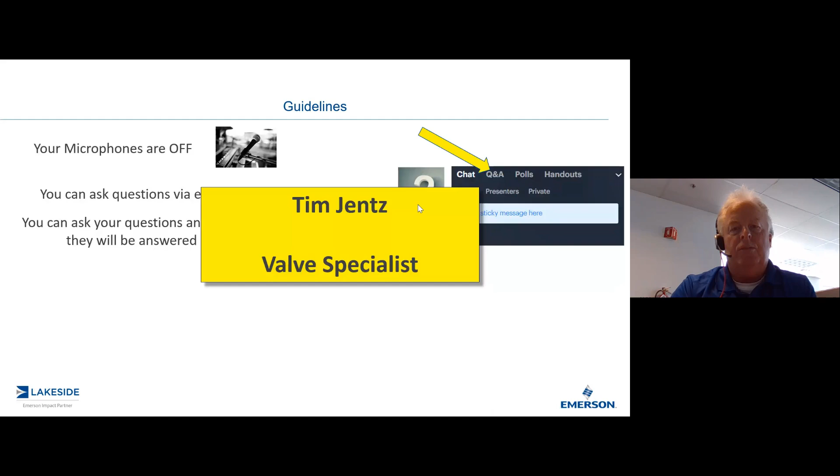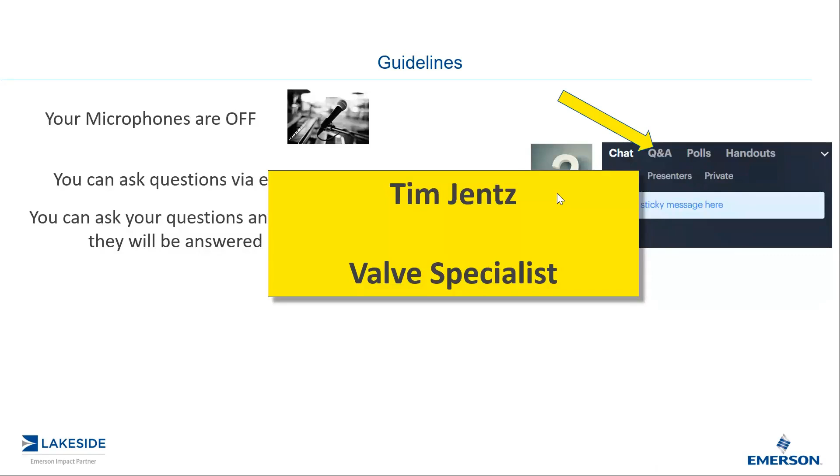Oh, there we go. There is a 10-second time delay from the moment I speak to the moment you hear me. So if light travels at 300,000 kilometers a second, that means I am 3 million kilometers away from you. And actually, this is where I'm broadcasting from.

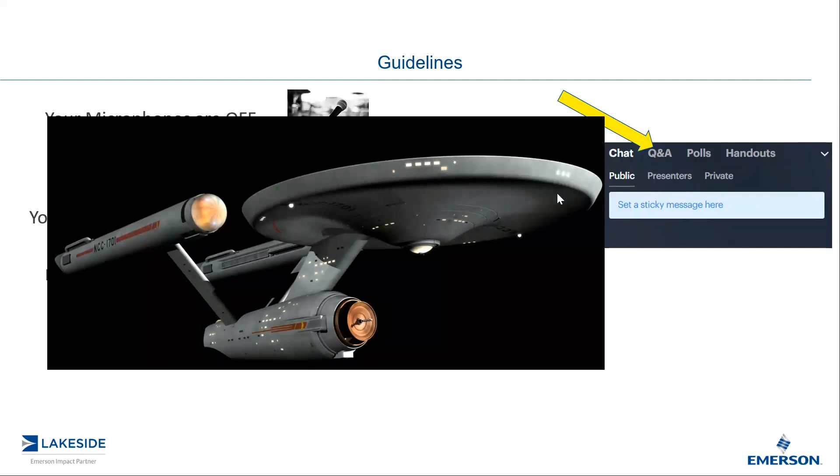And this is my other colleague here. He doesn't have a very good sense of humor. I try to make him laugh, but it never seems to work for some reason.

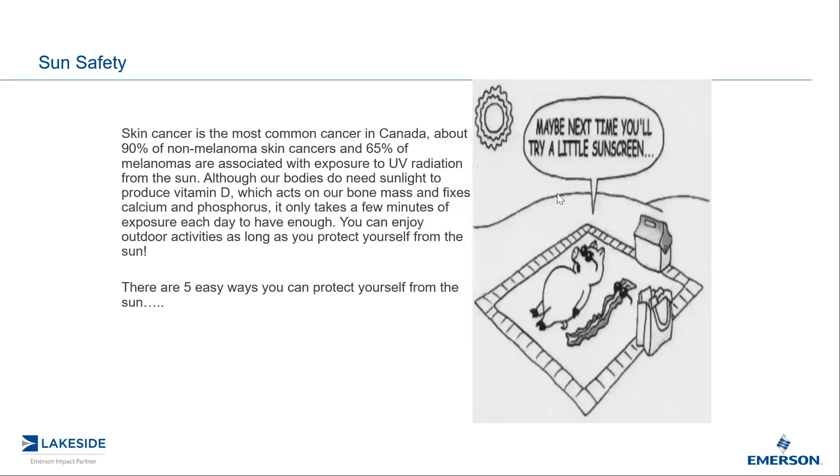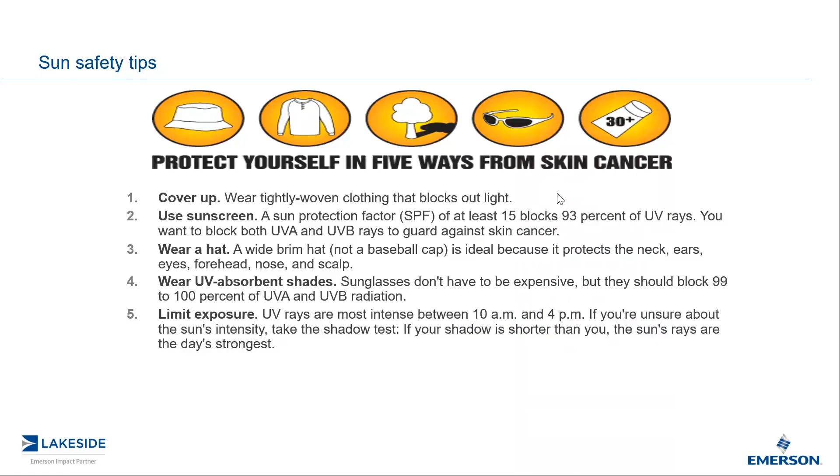Bit of a safety moment right now, and this actually touches me a little bit personally. I went to see a dermatologist yesterday, and I have a not-serious skin condition caused by excessive sun exposure. So obviously, especially on a day like today, and as the weather starts getting warmer, skin protection is very important. Cover up, sunscreen, SPF of probably up to 50. So be careful. Even if you're young, we'll all be young and stupid, but it kind of catches up to you later on in life. So be wary of this, be aware of this earlier on in your life.

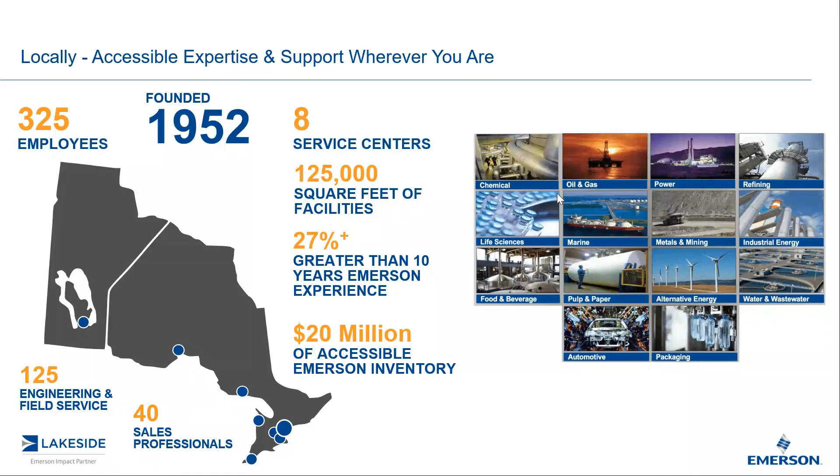A little bit about Lakeside. Founded in 1952, we have offices here in Mississauga, Guelph, Sarnia, Sudbury, Thunder Bay, Winnipeg, and Port Elgin as well. And we actually work in all these industries right there, and I've worked pretty much in all of those industries myself. Lakeside is part of a larger network called the Emerson Impact Partner Network. There are 21 of them.

We all have our own distinct territories, and therefore we do not compete with each other, though sometimes we help each other out. Our territory, number 9, goes from the Manitoba-Saskatchewan border all the way to just this side of Kingston. East of there is taken by Laurentide Controls all the way to the Maritimes, and west of us is Spartan Controls.

We're locally certified, the primary source. If you want to buy an Emerson product, we are the exclusive distributor within our territory of Emerson products. We will know who to talk to if you have a specific application, and who to talk to at Emerson to get the proper solution for you.

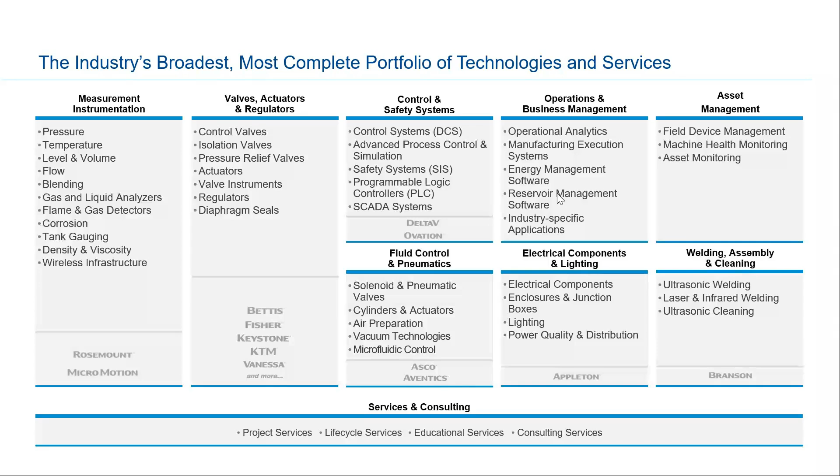This is kind of a terrible slide, but we sell a lot of stuff here. On the instrumentation side, control valves, regulators and so forth. We also have our own control DCS platform called DeltaV, and another one called Ovation, primarily focused in the power industry and water and wastewater. We also do project management, manufacturing, assembly, educational, and project and consulting services.

The idea here is we want to make sure that every time you have a deal, you deal with Lakeside, we want to make sure it's a positive experience and that we're able to help you throughout implementing your solution. A little bit about who I am.

This is a pre-pandemic haircut you see there. I go in the field and actually assist and tune control loops for customers. We talk about how actually tuning control loops is the last thing you do. We need to have a good process, control strategy, and instrumentation before loop tuning is effective.

I also deal with advanced control. MPC stands for Model Predictive Control, and neural nets as well. As a matter of fact, I know there's someone in the crowd today where I'll be experimenting with a neural net to actually predict a lab value, and hopefully, if we get good correlation, allow the operator to make a decision before we actually get the actual lab value.

So, very interesting, DCS alarm metrics. A lot of times DCS alarms as part of a DCS project are actually the last thing we think about. We tend to set all the high-high alarms at 90%, high at 80% span, low at 20%, and low-low at 10%. We don't put a lot of thought into it.

When we start up the plant, we get a whole bunch of alarms, and two things will happen there. First of all, it's like, where's Waldo? If we have a critical alarm coming in with a full alarm banner, there's a good chance the operator is going to miss it, and that's when bad things happen.

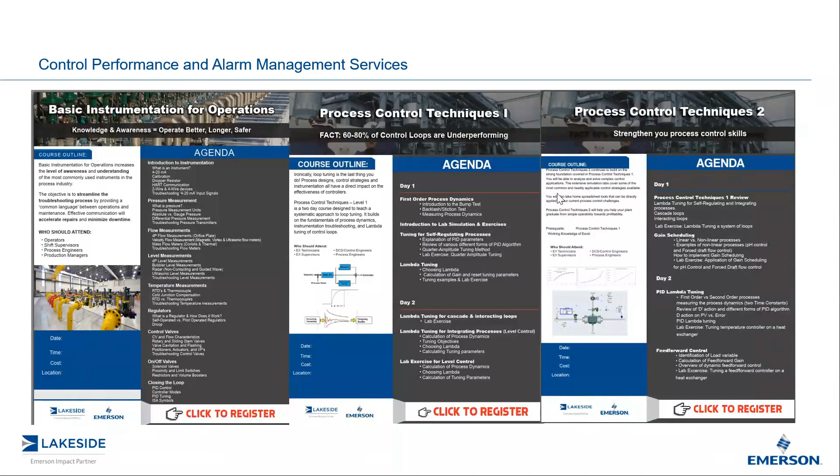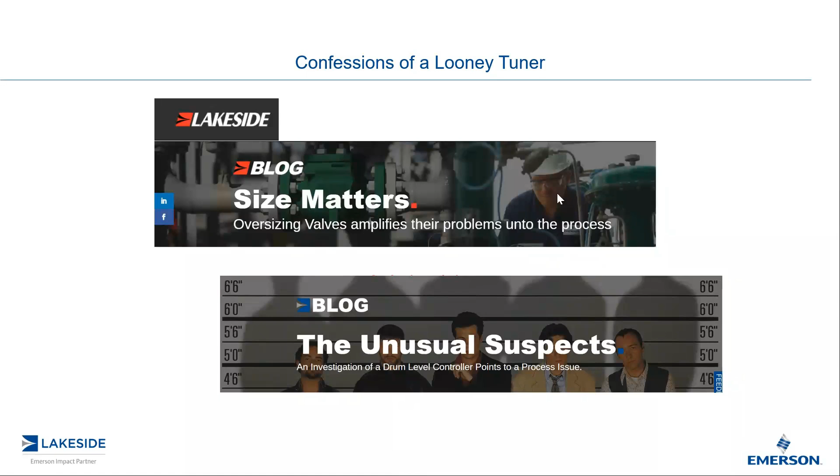So, okay, this is the thick of it here. What are we going to cover?

We're going to talk about what a control valve is, the components of a control valve, different types of valves, the CV curve and how it relates to actual flow, valve sizing, backlash and stiction, and the EnTech valve spec.

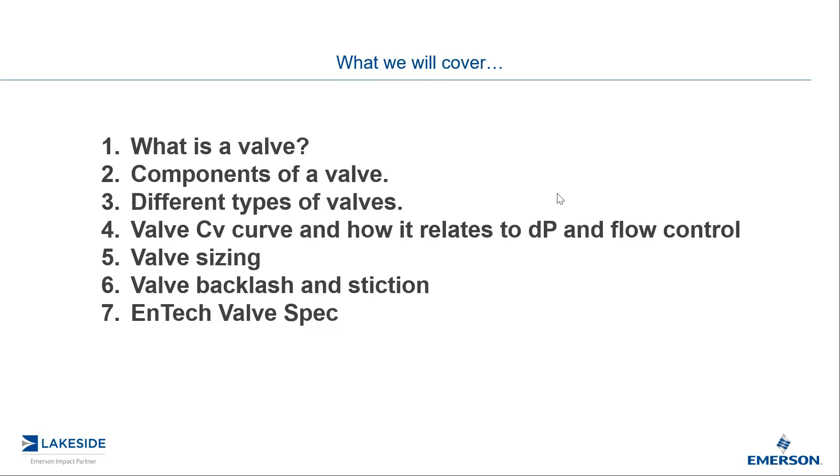I'm not sure if you have it, but the EnTech valve spec is actually available if you go to your handouts tab, you can download that PDF should you wish to.

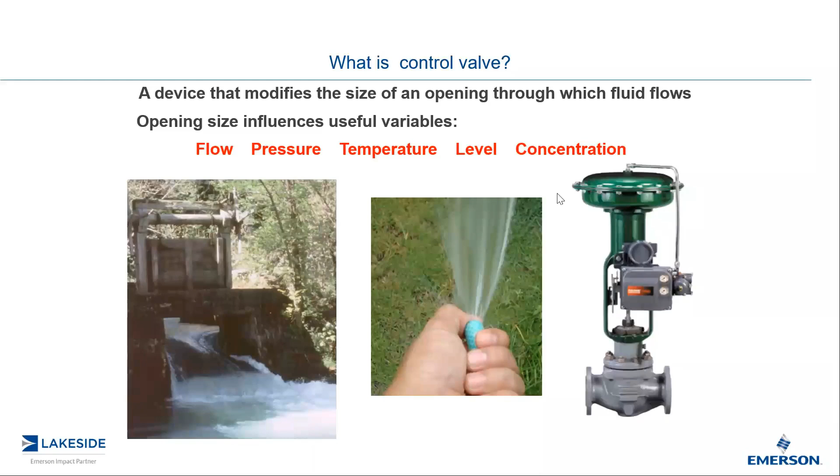So what is a control valve? It's a device that will modulate flow. Now we have level control valves, pressure control valves, temperature control valves, and so forth, but a control valve will modulate one thing and one thing only, and that is flow. It'll do that by varying the size, the aperture of the opening within the valve body itself. The more open it is, the more flow it will pass through.

The actuator is the muscle that will actuate that valve, be it linear or rotary. In this case, it's a linear valve. We have diaphragm actuators, piston actuators, single acting and double acting piston actuators, and you can also have electropneumatic actuators as well, and electric actuators.

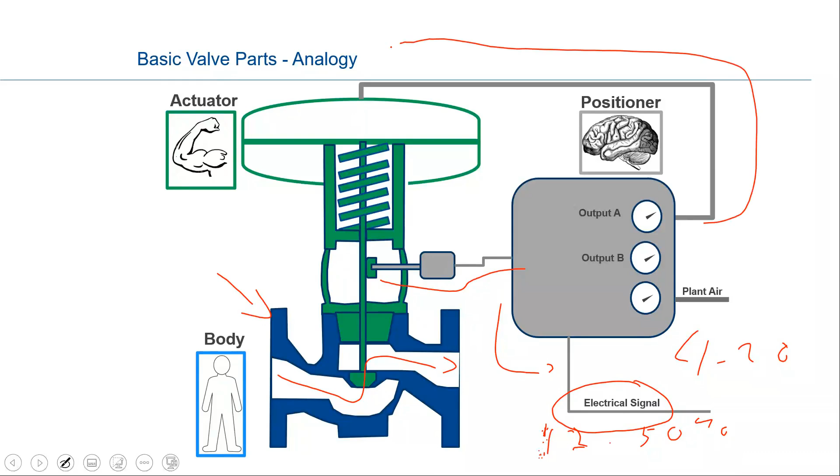Based on where the valve position is and where we want it to be, it will then actuate the valve to make sure that it comes back to where it should be.

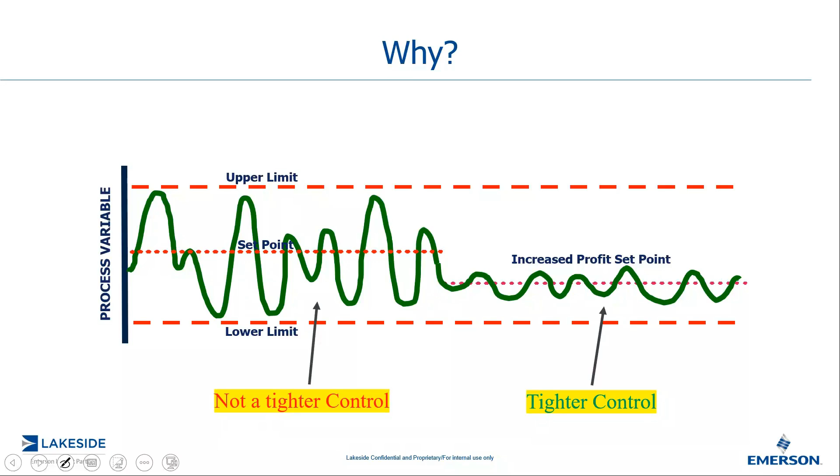And why do we do this? Why do we go through so much trouble with control valves to have the right actuator, properly sized, and a positioner? It's because the more precise and dynamic a control valve will be, the better control we will get. Based on that, we'll be able to do tighter control, target shift, and increase our profit margin, increase our production rate, decrease our material costs, and energy costs.

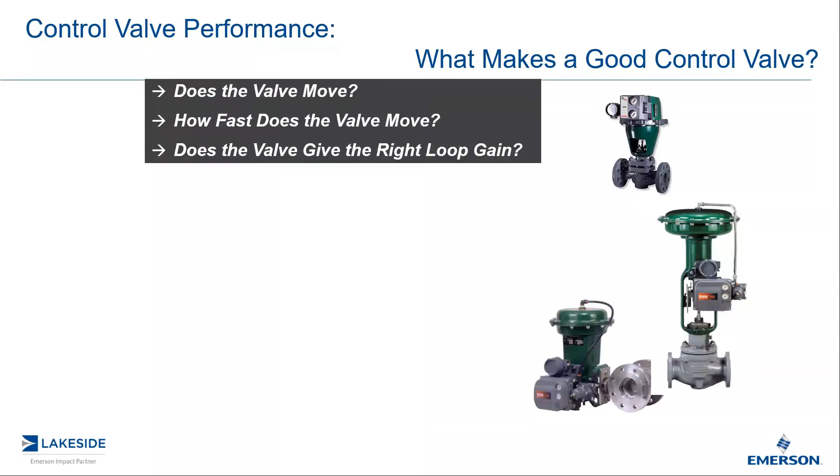Thanks Sylvain. So obviously a good control valve needs to make sure that when it's designed, it has a number of good attributes that make sure it will respond to the control signal. So what are the three main things? Does the valve move? How fast does it move? And does it have the right gain? And I'll be careful with that word gain, because Sylvain will get into that a little bit later when he gets into the meat of his material.

So obviously, Fisher Controls, the manufacturer of the valves that we deal with, does a lot of flow geometry testing using CFD and design modeling to make sure that when the flow goes through the valve, it's stable and there's no instability when the flow is going through the valve.

I get a lot of questions from the field about good and bad friction. Well, there's really not good and bad friction. What we need to understand is what the friction is in this valve, and make sure it stays within the design parameter spec it had when it left the factory, so it can hopefully maintain that same friction.

Sylvain will get into that. And we need to ensure there's no lost motion, what we'd call slop, a slang term, but we want to make sure there's no slop in the control valve.

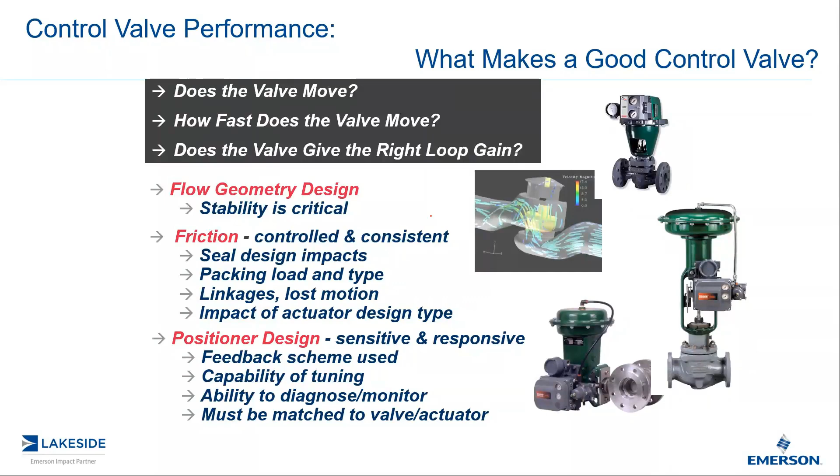There are two types of valves: rotary valves and sliding stem valves. This is a rotary valve, a very common bread and butter type, a V-ball valve. You can see there's a V notch. It's actually a ball valve, though that can be a misnomer because it's really a segment of a ball, not a full sphere. The V notch actually improves linearity.

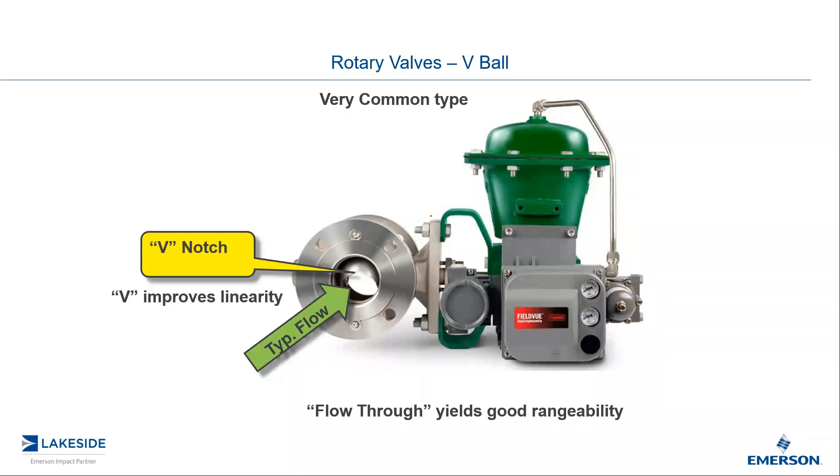This is going to be critical, we'll talk about it later when discussing linear flow characteristics. Typically the ball will face the flow, in most cases, not all. When the ball or valve is completely open, the fluid passes straight through, so there's no tortuous path. That gives it very good high rangeability.

A rotary valve like a butterfly valve is essentially a disc that rotates, changing the open surface area to allow more or less fluid to pass through.

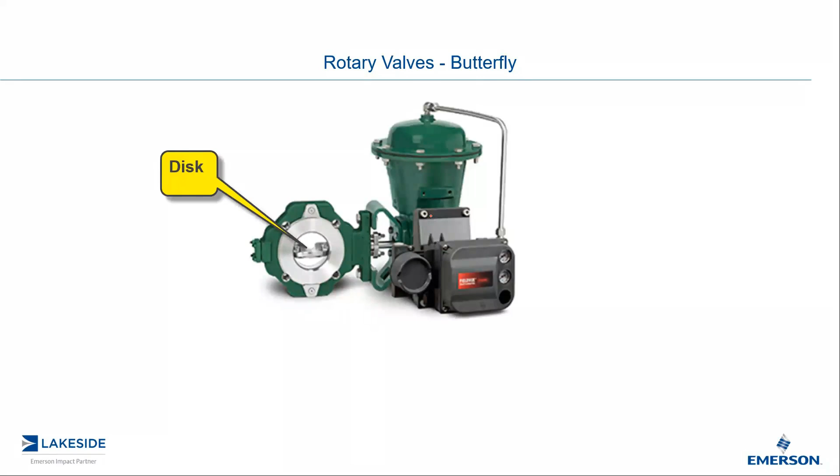Now you've got to be careful here, I know Tim's listening to me right now. A traditional butterfly valve has a quick opening flow characteristic, which we'll talk about later. But we do have other models, what we call a control disc, which isn't an attachment but a modified disc that provides more linear flow characteristics. Maybe Tim, you can add to that.

Sorry, Sylvain, I was typing, you probably heard me typing, so you might want to repeat the question. I'm sorry, no it's not a problem, I can't multitask either. No, I was talking about the quick opening flow characteristic of a traditional butterfly valve.

But we do have also something called a control disc that can provide more linear flow characteristics. I was wondering if you could add a little bit to that.

So the control disc is a design that Fisher has put into the shape of the disc, and depending on how it's modified, we can actually create a CV curve that's equal percentage based on the shape of that disc. So it's not your traditional shape that everybody's familiar with.

It's actually got, and I'll use the term, and I know Fisher sometimes doesn't like to hear this because it's not technically right, but they'll put a fishtail on it, and the tail will actually be on the upstream side of the valve. As the valve opens, it actually creates an equal percentage flow, which Sylvain will get into, and that's a good thing because it allows for traditional applications where butterflies would go to actually be used in a wider range than a traditional one. Awesome, thank you very much.

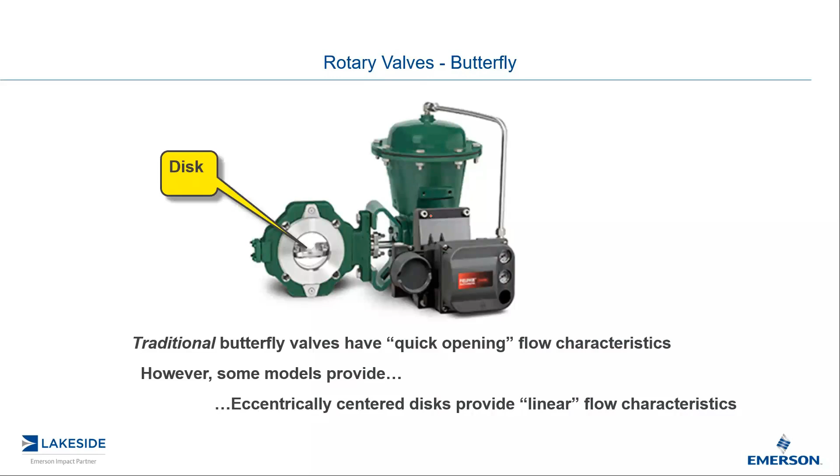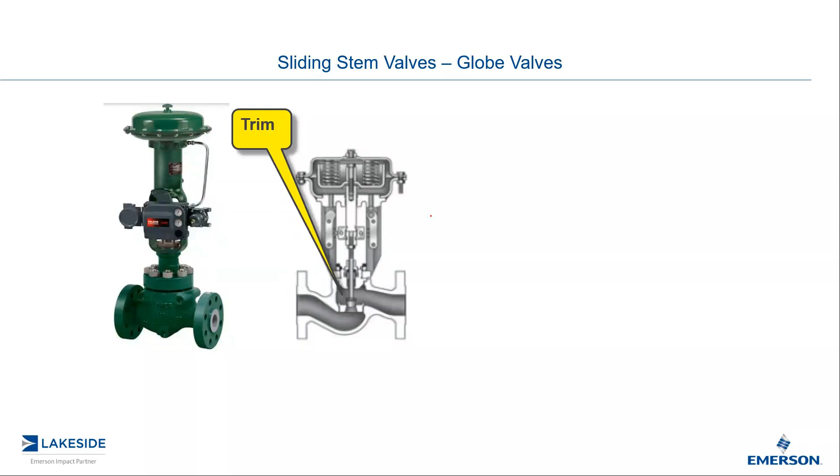So sliding stem valves, as the name implies, the actual stem will move up and down. So it's a linear valve. And right there is a trim. The shape of that trim right there will determine the flow characteristics. Now, what I'm showing you there is actually a stem-guided valve.

But there is also a cage-guided valve, so maybe I'll go backward here. Globe valves are very good at good rangeability. We'll talk about that a bit more later on, but they can actually modulate from about 20 to 25% open all the way up, getting good modulation range up to about 80% open. A lot of other types of valves no longer modulate at such an open percentage.

So they're very, very good at modulating a very wide range, as well as they can handle very large pressure drops. I've seen some, especially severe service types of valves, where they can handle up to even 1,000 psi. They're very specialized, but they are a specialized type of valve. But they are sliding stem valves as well.

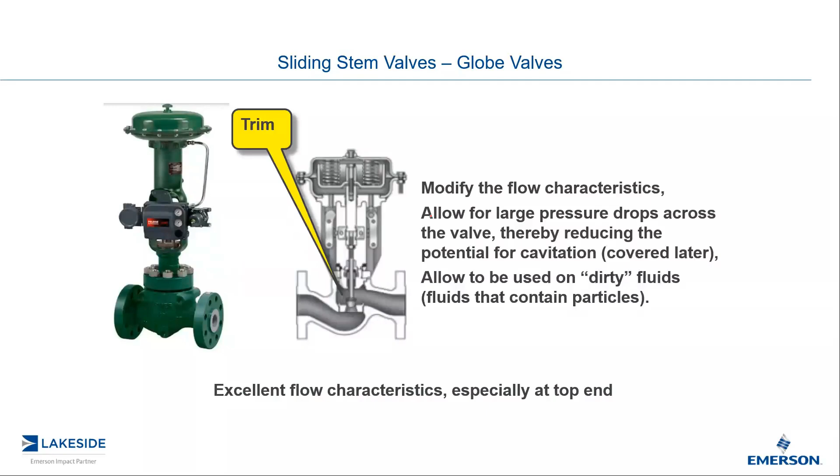And as I mentioned, there's also a cage-guided valve. So what you can see there, inside that cage is actually just a cylinder plug, just a plain old plug that moves up and down. As it moves up, some of the fluid will start to come out through the actual characteristic, the opening there. And you can see the shape of that opening will determine the flow characteristic of the valve itself.

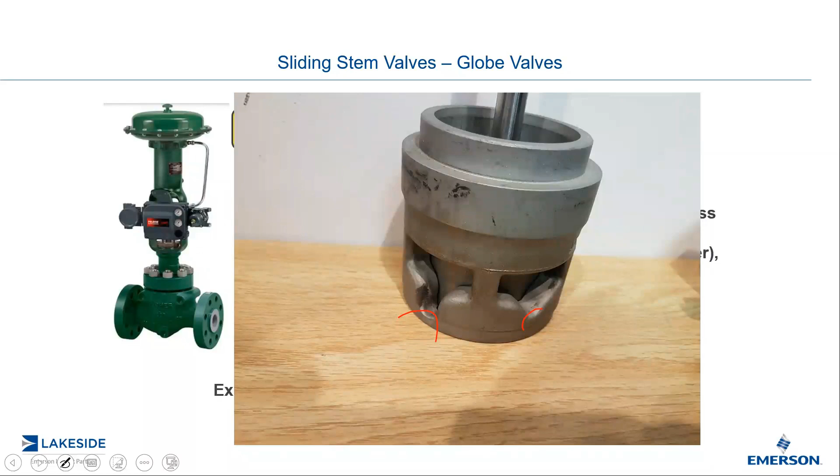So when you buy a control valve, it comes with a CV curve. Typically CV curves can be equal percentage, linear, and quick opening. And what I'm going to do now is put a poll out, and I'll give you about 5 or 10 seconds to answer which one of the CV curves do you think is most common.

Oh, it's coming, they're coming in. This is great, thank you for participating. And it's a bit of a close race. So 44% said equal percentage, 34% said linear, 21% are saying quick opening. You can keep on answering. Thank you for participating.

So actually the most common type of CV curve is equal percentage. Now it makes you wonder why. I mean, don't I want a linear kind of flow response? I want to achieve a linear flow response, but you have to understand that as I open up my valve,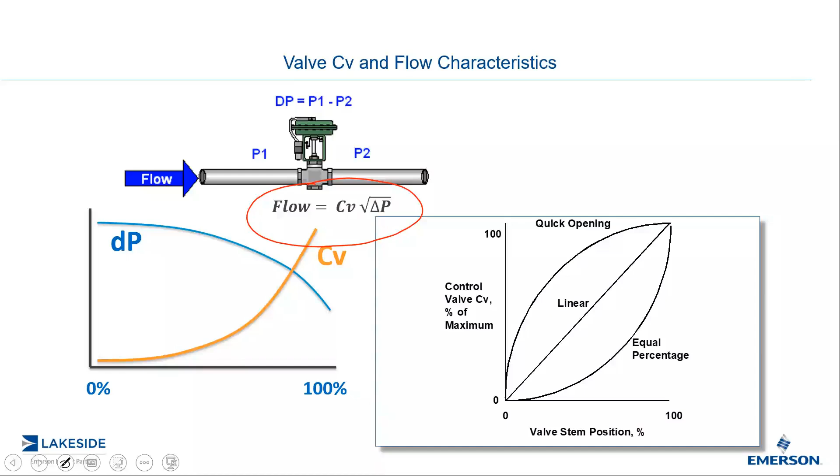And you can see here, you can imagine as I open up my valve, the opening gets bigger and bigger, there's less resistance. I will then lose less energy as the fluid passes through. Therefore, P2, the downstream pressure, will tend to go up. Therefore, the differential will tend to go down.

Now there's also another situation as well, especially for liquids, where you have a pump curve. Each centrifugal pump will have a pump curve, it can only deliver so much energy. And the more flow being generated, being pumped, the lower the discharge pressure will be. So you've got a bit of a double whammy here.

So therefore, that's why as the valve opens up, we know the pressure drop, the DP, will fall. And that's why we need that extra kick as the valve opens up to compensate for that. Hopefully, we will have a linear flow response. That is our objective.

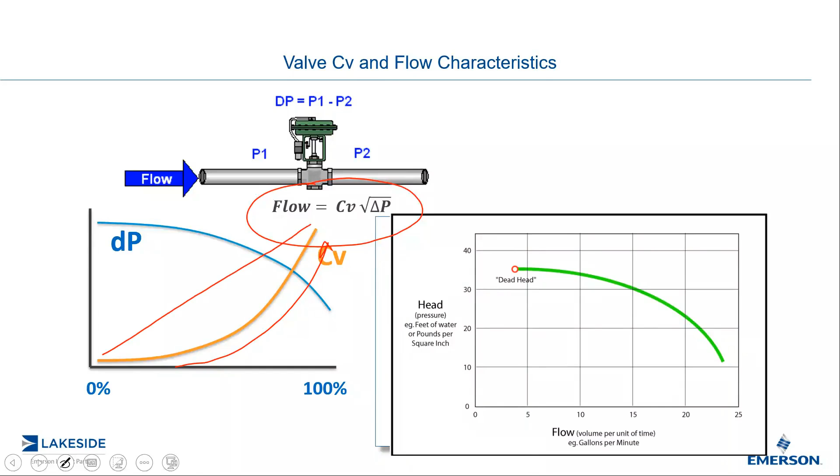So this is what can happen here. This is actually what happens when this is actual real data, and this data was collected back in December of 2018.

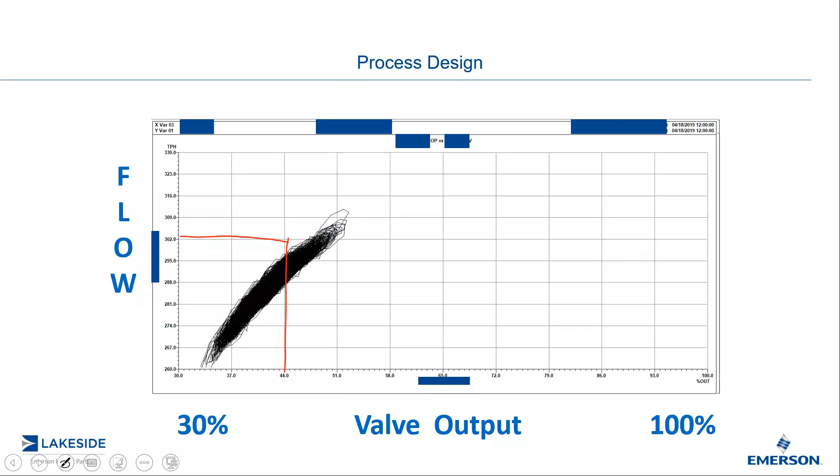What I want to show you here is actually a pump failing, and the pump is wearing out. So you could see here at 44%, in this case, I was getting 302 tons per hour of flow. And then in April, you could see I'm getting less flow for the same valve opening. And then in May, even less.

And so the issue was that obviously if we're actually operating right around here, we were no longer modulating the flow characteristic. In this case, because the pump was failing, was wearing out, they were not able to actually modulate and control the drum level. In this example, this is feed water, very, very well, because they were actually not able to modulate. So this is kind of similar to a type of valve that we're going to talk about in a minute.

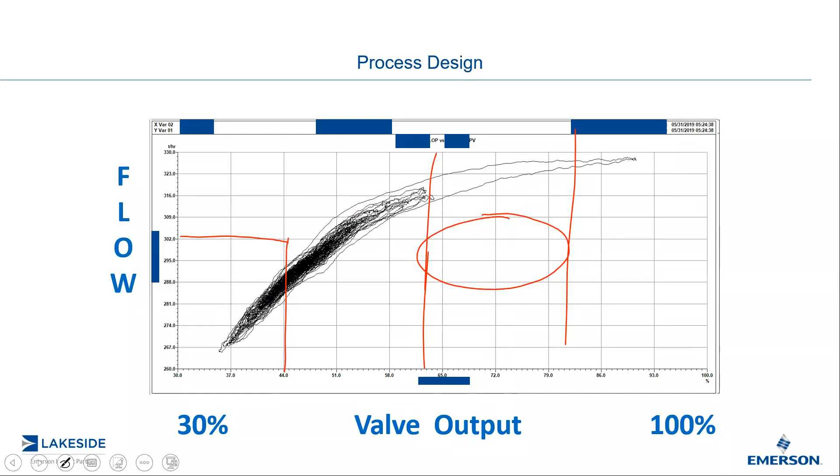And again, this is the actual pressure versus flow curve, or flow versus pressure curve. You can see the more flow being pumped, the pressure is actually dropping. This is back in November of 2018, and then this is in May of 2019. So you could definitely see, if I flip back and forth, that the pump is actually wearing, that curve is dropping lower and lower and lower.

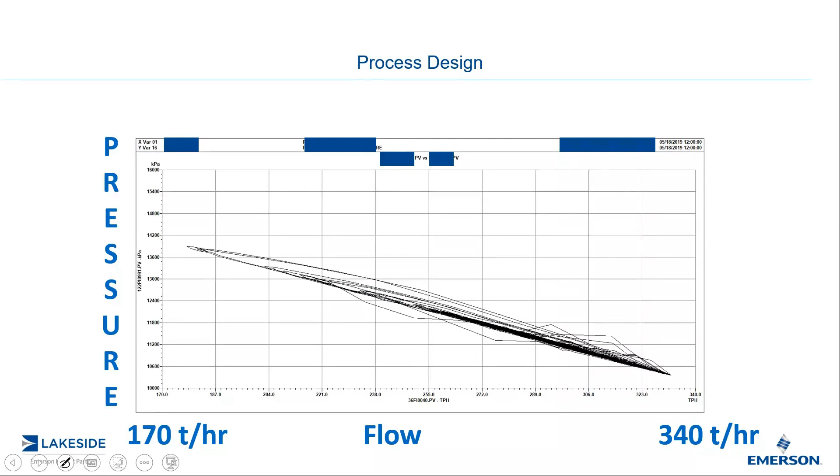So I'm going to show you a bit of a demo here, to further that concept. There's a lot going on here. Okay, so this is a simulation that I built. Don't get too excited about this, it's kind of a rough simulation.

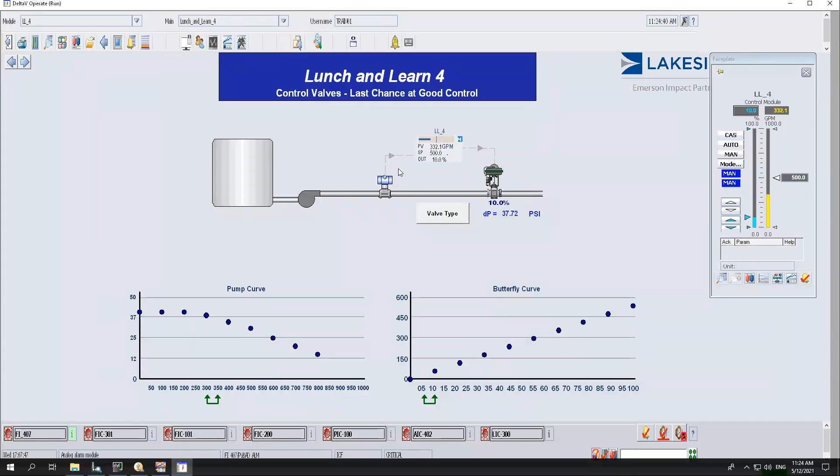But what I've done here is I built a pump curve. So the bottom axis here is the actual flow. This is a flow control valve, we're measuring the flow, we've got our controller here, the faceplate is right here, the output goes to a control valve. The valve's at 10%, and right here there's 37 PSI drop across that valve right now. And as the flow increases, the actual discharge pressure of that pump will start to drop.

Now I can have two different types of valves here. Believe it or not, and I always found this kind of hard to believe myself initially, a butterfly valve actually has a borderline equal percentage CV curve. So on the bottom axis here you see the valve opening from 5% to 100%, and that is a CV value on the y-axis.

So here we go to 50%. And now I'm still operating in this range, and now you can see I'm definitely falling off the pump curve. So let me show you this in a trend.

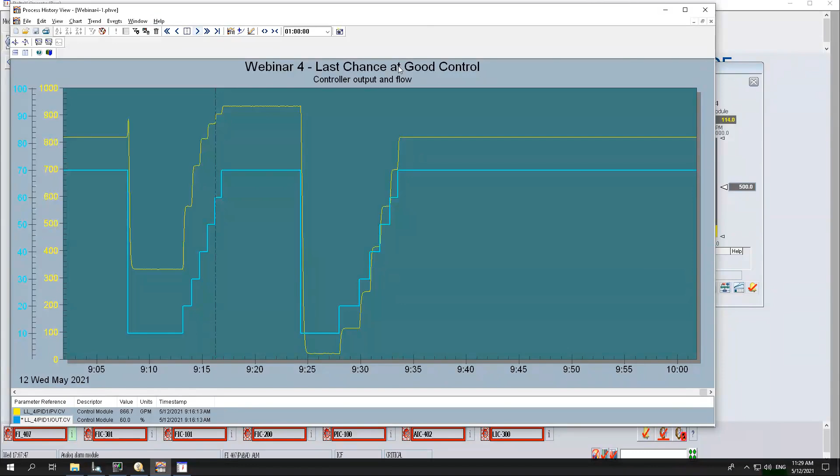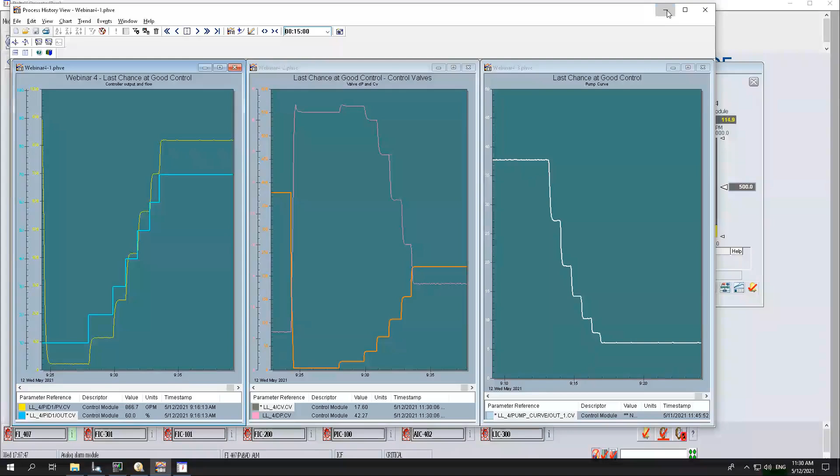One more thing I want to show here, let's go back here a bit more. This orange here is the actual CV as the valve opens up. Let me set this up properly again. You can see here for smaller openings, I get less CV change, but the more I open, the CV increases. Essentially it's following the CV curve we just talked about. That equal percentage is there to compensate for that drop in pressure, and we're trying to linearize the flow.

Let's talk about valve sizing. Valve sizing is very, very important. So when you call up Lakeside and say I want to buy a control valve, we're going to ask you a lot of questions, from what type of fluid it is, to what the inlet pressure will be, and what the outlet min, max, and normal flow are. Based on that and a lot of other questions, we'll determine what type of valve and what size of valve should be used.

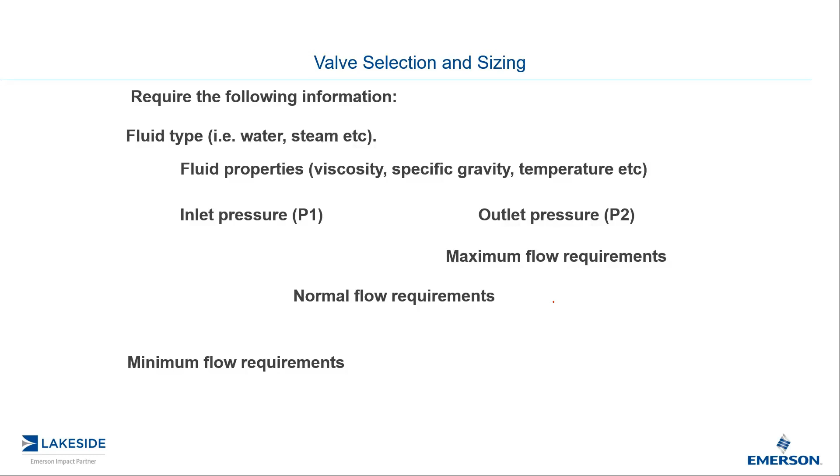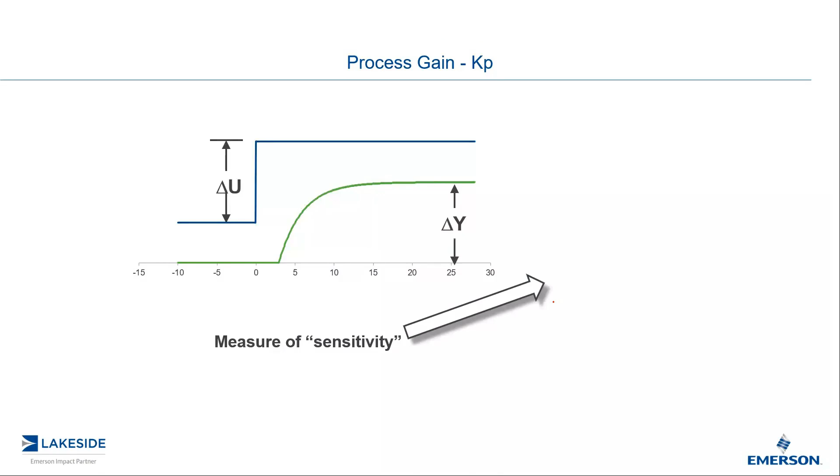Now I look at it from a control perspective, from something slightly different, from the process gain. Again, we're not talking about a PID proportional gain here, so that's why I shy away from using the term process gain. I'd rather talk about process sensitivity. The process sensitivity is a ratio of a change I get in my process versus a change I made in my output, the command to the valve, and then I observe how much change I see in my process.

I talk about this in the universal language of percent of span. The process sensitivity, Kp, is the ratio of a change I got in my process for a change I got in my delta U. So for a properly designed control loop, Kp, your process sensitivity, should be between 0.5 and 2.0. That means for a 1% change on my output, I want to see my process change between 0.5% of span to 2% of span.

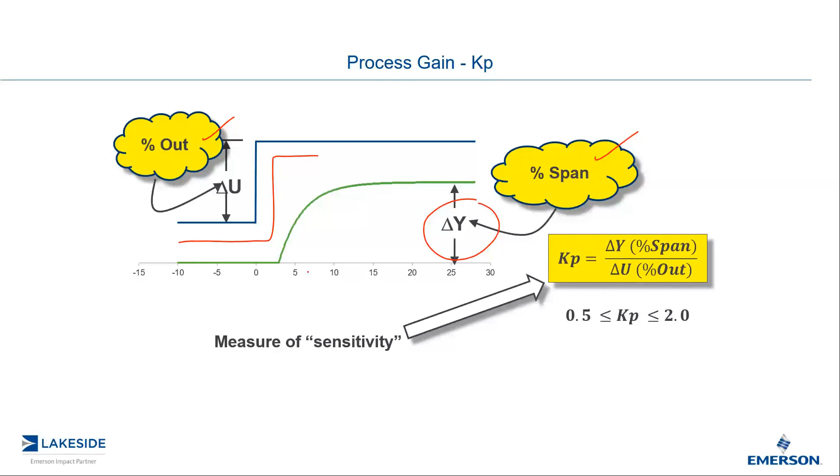All too often though, I'll go in the field and do some bump tests, and I see my process gain could be 3, maybe 4, maybe 5. That means for a 1% change over here, I'll see a 5% change on my process. What do you think that means? Well, if I do a small change and get a big change in my process, the odds are - no guarantee, but odds are - that valve is probably oversized.

Why? What's wrong with oversizing control valves? First of all, a control valve that operates at 25% or less most of its life is likely to be oversized, and we're wasting a lot of horsepower across that valve. We may even end up wearing out that valve because the velocity of the fluid passing through is so high. But the biggest problem with oversizing is that if I have a 1% problem on my control valve - backlash and stiction, we'll talk about that in a minute - it translates into a 5% problem on my PV. Therefore, oversizing control valves can make small valve problems big problems on my PV.

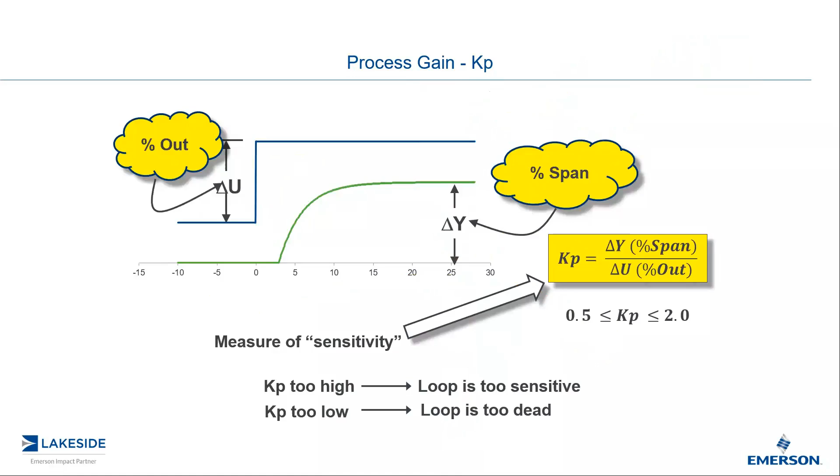And that's something we want from a control perspective. We like things to be as linear as possible. It makes tuning more robust at a wider range. That's why we want a more linear flow characteristic.

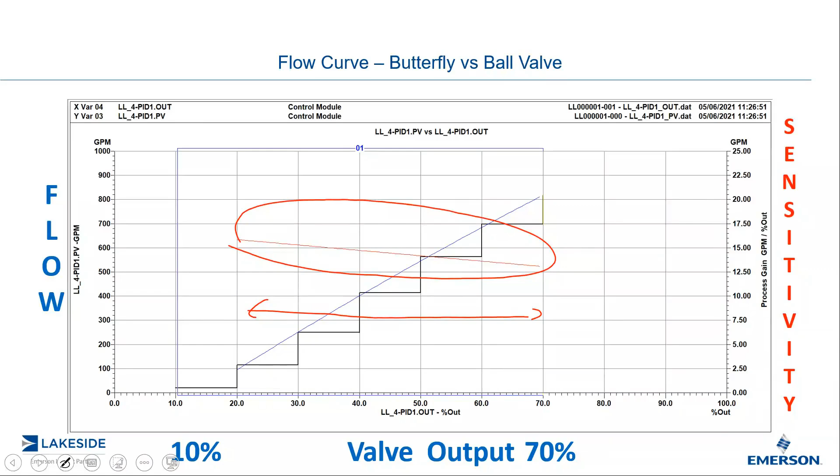Now, you heard me hint about valve backlash and valve stiction. Precise control equals good control. So a control valve needs to be precise, and that's why we talk about putting a positioner on a critical application, a component of the control valve to make sure we actually position that valve precisely.

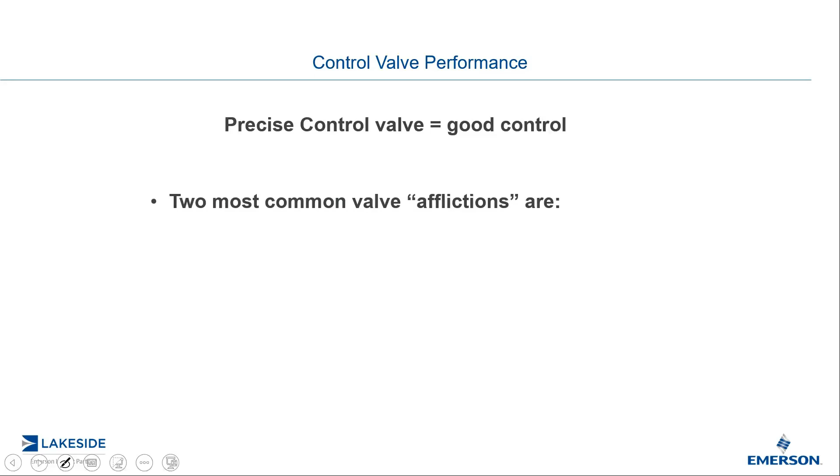Now, control valves suffer from two major afflictions. One's called backlash or hysteresis, and the other one's called stiction, or a sticky valve, a valve that hunts.

So how do we actually detect it? When I go to a control valve, I want to do some bump tests, because that's how I'm going to calculate some process dynamics when I do my bump tests, and that's how I actually will use that information in my tuning.

But also, I use the bump test to determine how precise the control valve is. So I typically start with 1% bumps.

There are two reasons why I do 1% bumps. One is to measure the precision of the control valve. The other is that I don't know if this valve is oversized, undersized, or anything like that. So I start with 1% bumps because I don't want to disturb the process more than I need to, to be able to measure my process dynamics.

Believe me, I've joined the megawatt club once, and once is enough. Yes, I tripped 100 megawatts once, and it was not a pleasant situation.

So here I go 1% up, 1% up, 1% up, 1% up, 1% up. Everything looks good. Now, backlash or hysteresis, the terms are interchangeable, is due to mechanical looseness, mechanical slop, as Tim calls it, within the valve assembly.

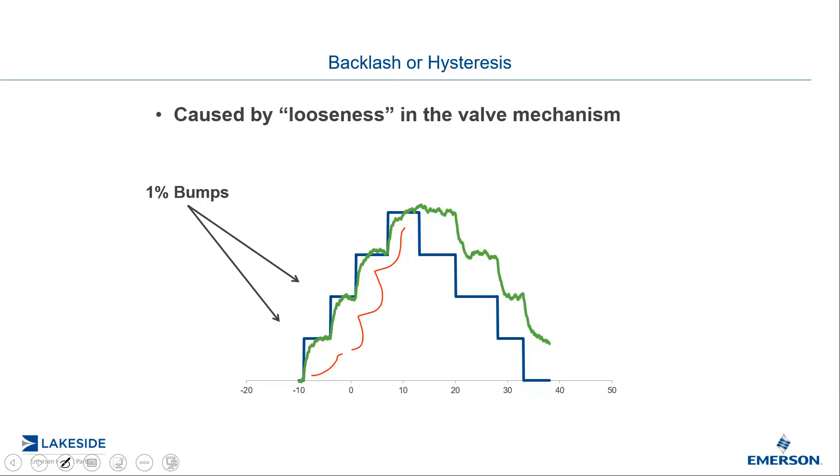The way that demonstrates itself is that when I now reverse direction, I will not see any change in my flow. In this example, I'll have 1% imprecision in my control valve, and that 1% imprecision will have a direct impact on our ability to control.

So I'm going to show you a video here.

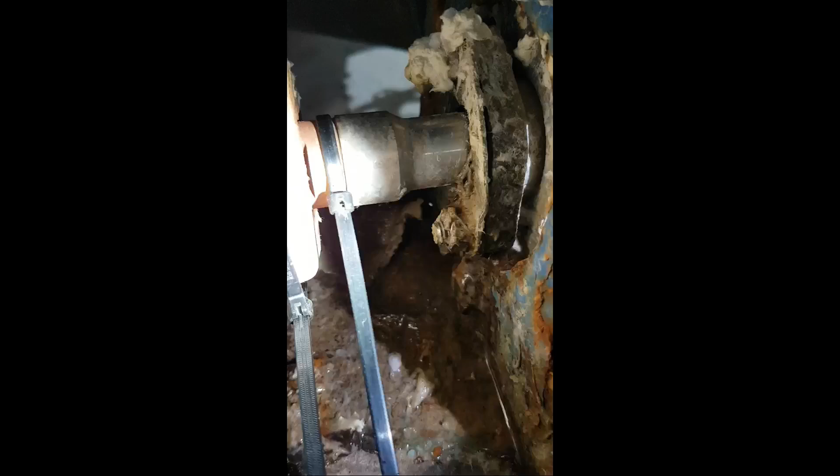Let me set this up first. So what you see on the right-hand side are two tie wraps. One tie wrap is actually attached to the valve stem. As it goes towards the right, that is going into the valve body itself. It is a rotary valve. That stem is then mechanically coupled to the actual valve actuator, and that's where the second tie wrap is. I use those two tie wraps to indicate the position, and it's patent pending, so you're not allowed to use that invention. I'll play it, and you'll hear me in the background.

I'm not sure if you hear me or not.

Now they're moved together. Backlash is taken up, so at this point the backlash is taken up. I'll pause it right there. The next thing is the valve will start to close, meaning the tie wraps will start going down. I want you to pay attention to the left tie wrap compared to the right tie wrap.

Now it's going to go the other way before it actually engages. As you can see here, in this example I would guess probably 6 or 7 or 8 degrees of backlash.

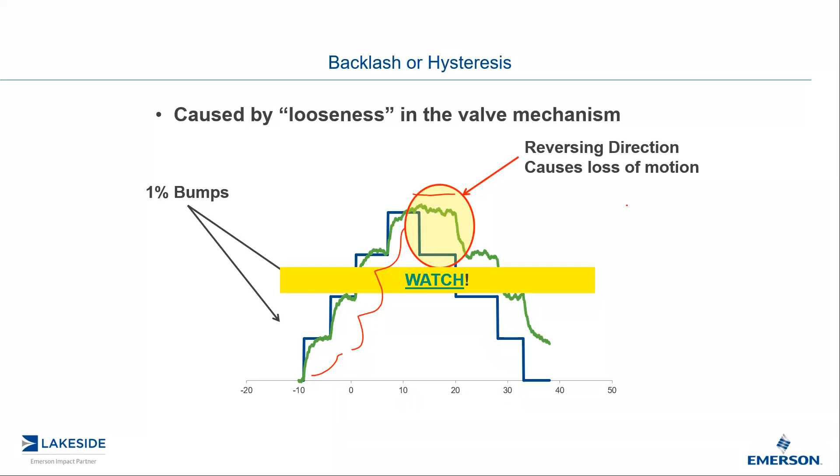And this was controlling a level control. It was actually controlling a very small, high throughput tank level. They kept on wondering why they kept tripping on high or low levels, and it was because that valve had almost 7 or 8% hysteresis or backlash.

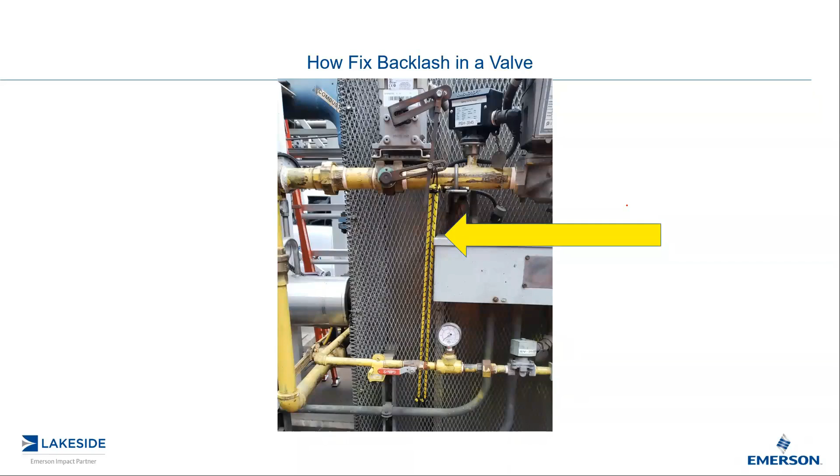So if you do have some backlash, what you could do is always use a bungee cord, just like we've shown you there, and kind of take up the slack of the control valve itself. Yeah, just kidding, don't do that. I do not advocate the use of bungee cords to fix backlash in a control valve.

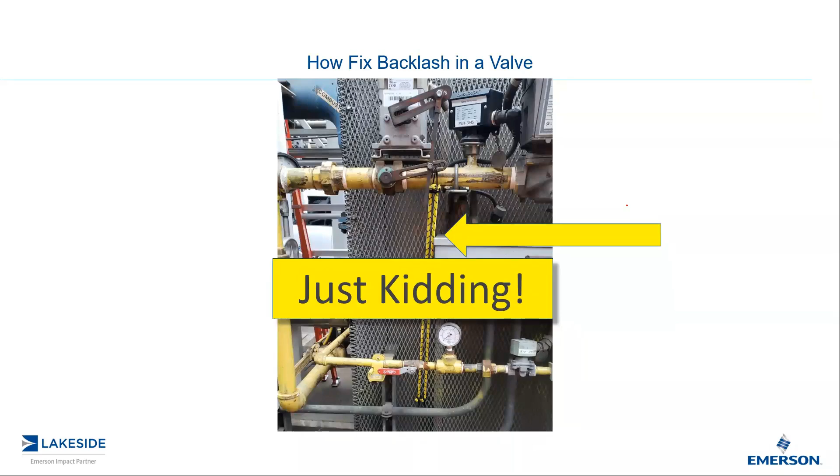So we're just trying to have a proof of concept that the backlash was actually causing variability in the gas flow in this example here.

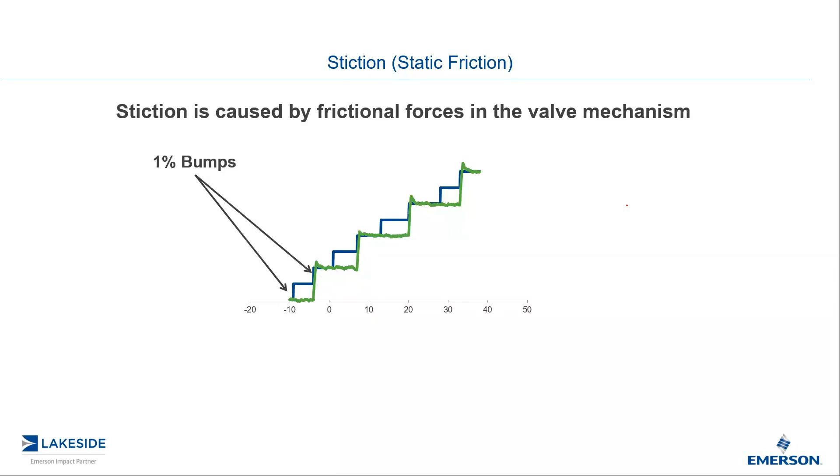Stiction, or static friction, can actually occur in many different places. It can occur within the valve actuator, the valve body, and it can even live in the positioner.

What stiction means is that there's a lot of friction. Therefore, we tell it to move, but there's too much friction so it doesn't want to move. You tell it to move a bit more, and a bit more, and finally you get a full change. That's going to have a very severe impact on our ability to control.

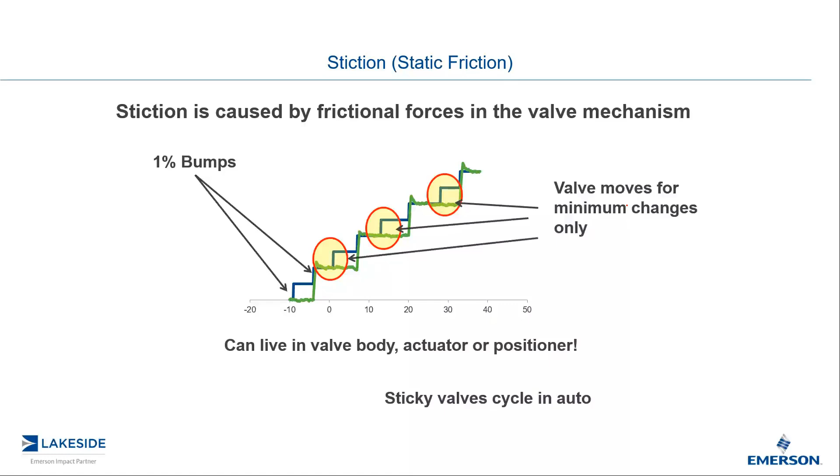And it does cycle in automatic as well, so I will show you that in a minute. But first I want to show you another video that I have, and I'll play that one here.

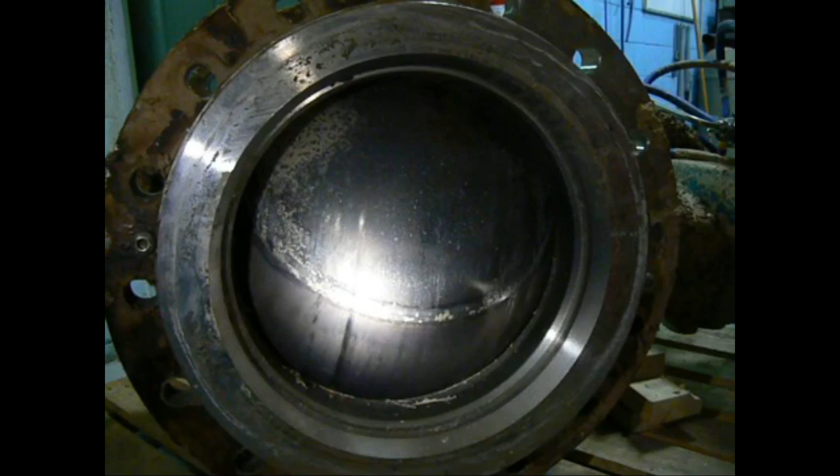So once again, I'll set the stage here. This is a large ball valve. This was actually done back in 2006, believe it or not. What we did here, we were documenting - I was self-employed then, working for a customer - we were documenting the performance of control valves. This is a brand new mill, and these valves were all sticking and causing significant production problems.

So we took one out. It's a pretty large ball valve. We had the actuator all tubed up with air, and we had a technician there with a 4-20 calibrator wired up to the positioner, and we're slowly opening up the valve as we go along. I'm not going to play the entire video, but you can see where the stiction actually occurs.

Go now, 4 milliamps, go. Start opening it. There's your stiction. Just keep going, open. The little machine gun sound you hear in the background is the positioner. And there you see the jumps.

So I'll pause it for a minute there. Obviously, we would like to see the valve opening be smooth and able to track the 4-20 command signals we're issuing to the positioner. But you can see there's a lot of friction in this example within the ball and the valve body itself.

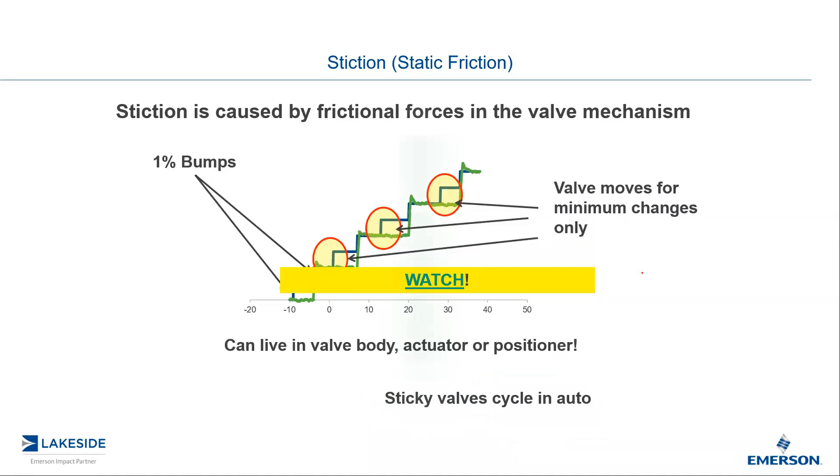So some of you, I'm sure, have seen this type of video. Often I've used them in different webinars and my courses as well. This is actually another simulated example, but it shows you what stiction looks like.

In this example, I go up 1%, 1%, 1%, 1%, and finally I see a change in my flow. Had it been backlash, that would mean for all of these bumps I would have seen a change in my flow, but I didn't. And that's how I differentiate between backlash and stiction.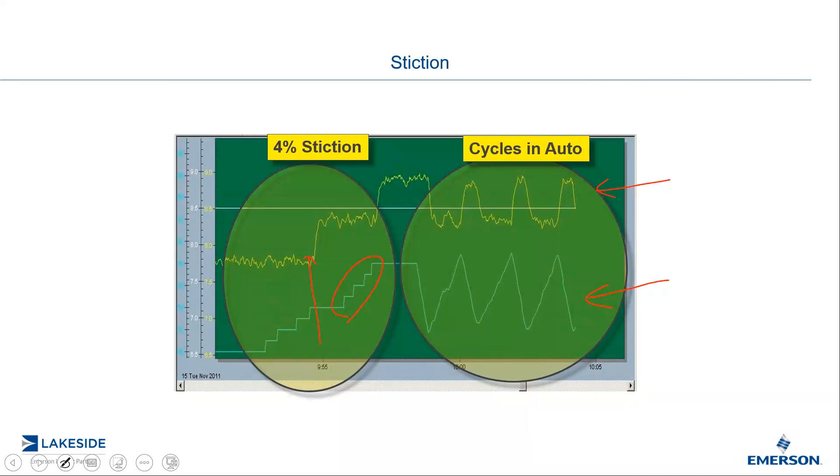And then when you put it in automatic, it will tend to oscillate. The output will be a triangular pattern, as you see there, and the PV will be sort of a shark fin pattern. That's one of the things - when I walk into a control room and look at all the trends, if I start seeing a triangular pattern on the output, it could be a sign that the valve is sticking.

So how much is too much? First of all, if you have a control-related issue, there's a 30% chance the valve is involved.

Backlash and stiction - no one said that they're mutually exclusive. No one said they can't happen on Tuesday but not on Thursday, or at 50% open but not at 70% open.

The idea here is to fix the problem right at the situation. If you have a bad valve, fix the problem. Don't use bungee cords, don't get too cute, and don't try to build a backlash compensator in software. Fix the problem at the source.

Tuning will probably make things worse. Tuning cannot fix a bad valve, and it will probably make things worse in automatic than in manual.

How much is too much? No more than 1%. Now, when I first started doing this back in the late 80s - I'm not sure how many of you were even born then - if I saw 1% precision, I was a very happy camper. Nowadays I expect 0.5%. So if I go up 0.5%, I want to see a change in my valve position, and if I go down 0.5%, I want to see a change as well.

Incidentally, a lot of times when I go into the field to check for precision, if the valve is accessible and not too high, I like to put my fingers on the stem to feel either the rotary motion or the linear motion. You gain a lot of insight into how the valve is operating just by sensing how that valve stem is rotating or moving up and down.

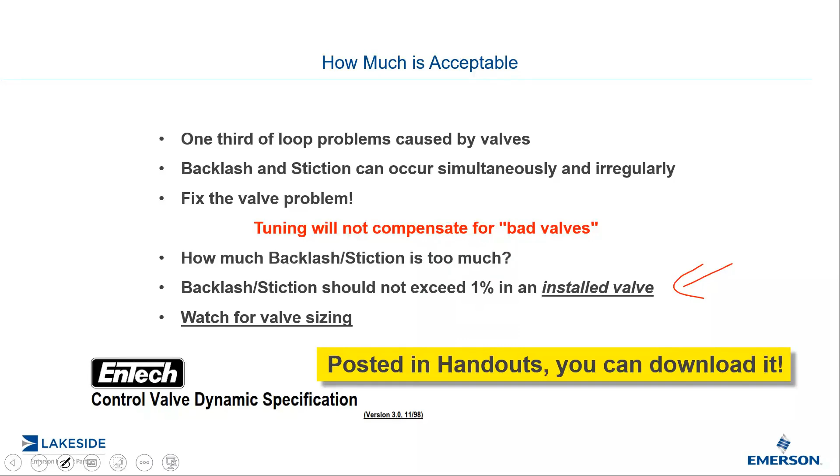So we're kind of wrapping up here. Last chance at good control: critical, the valve needs to be properly sized. Sometimes we ask too much of a control valve - we want to control down at 10% range and also control at 80% range. Can we do that with one valve? Probably not very well.

We may need to talk about doing split range control, which is a subject of a future webinar. But really, properly sizing valves is very critical - make sure they get proper modulation, not over-modulation, not under-modulation. Remember, the lazy person's way of sizing a control valve is: if I've got a 4-inch line, I'll put in a 4-inch valve.

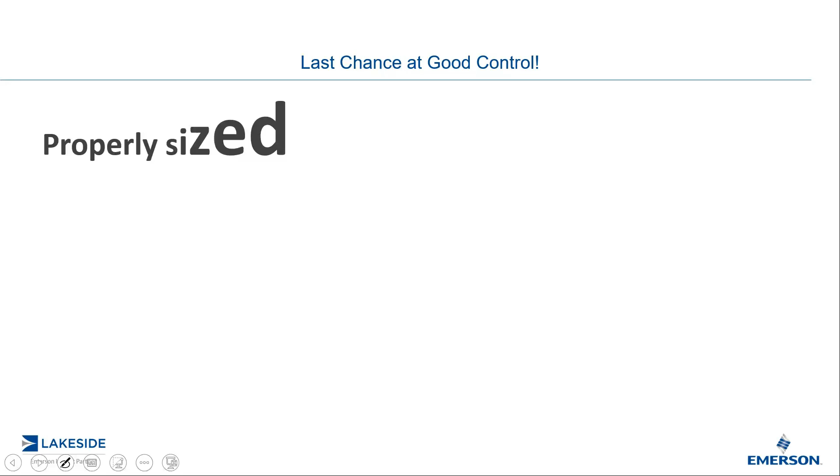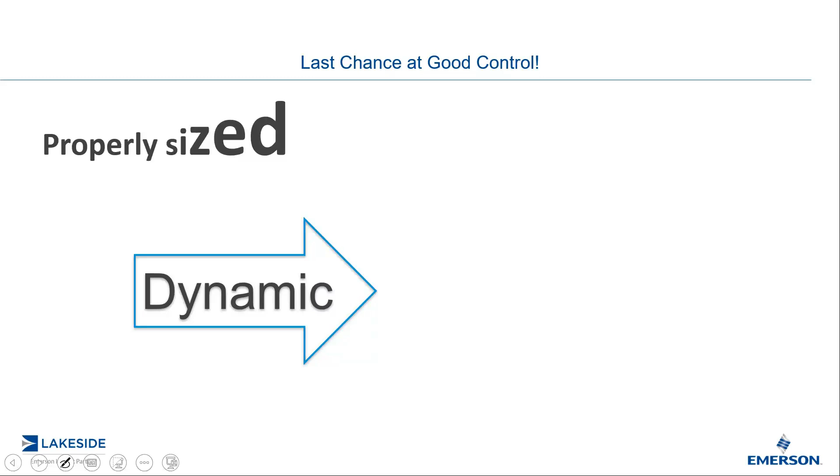Dynamically, we need to make sure we have a properly sized, properly precise valve, but if it takes 3 minutes for my valve to go from 20% open to 30% open, that's not very good either. So the valve needs to get to its new position correctly and precisely. There are three things we need from a control valve: properly sized, properly dynamic, and precise.